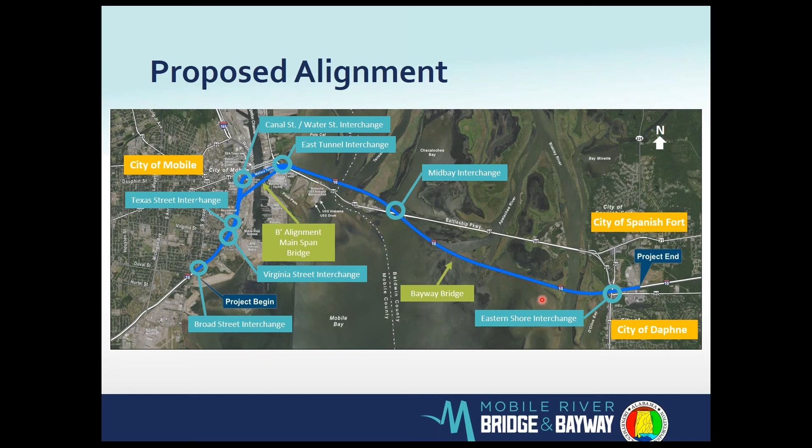7 interchanges. You've got 3 different cities to deal with. You've got the city of Mobile, Spanish Fort, and the city of Daphne. So you've got 3 of those. You've got 2 counties, Mobile and Baldwin County, and a partridge in a pear tree. So there is a lot of stakeholders in this thing. So you can imagine the environmental hoops.

Real quick, just a brief discussion. Near the main piers, you're encountering, which is the MB1 boring, sand that's really kind of a loose sand. You get into a little clay layer, then you go back into denser sand, medium dense to dense sands, and then back into a pretty stiff, very stiff to hard clay. On the Bayway, however, we had about 35 to 40 foot of weight of hammer type material. Muck, basically, is how we call it down in Alabama.

And by the way, if you can't understand me, I've been in Alabama for 18 years, so bear with me.

Then we get into more of a medium dense to dense sand and then back into a clay. So it was fairly consistent across the Bayway, that material, as you would expect in alluvial soils down there.

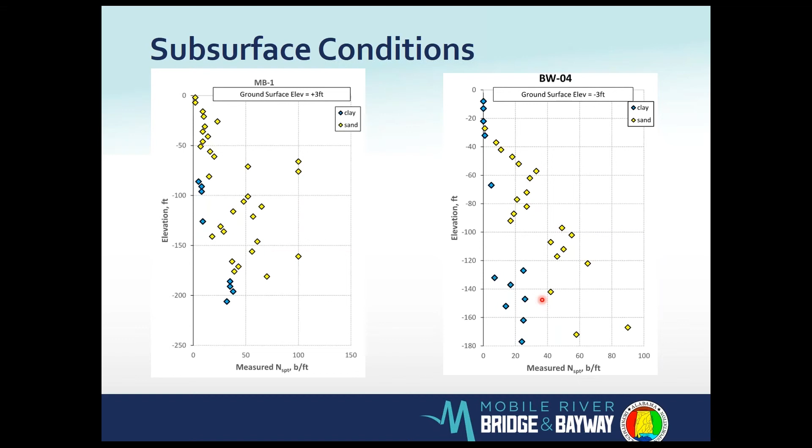So number two, this is where the meat of what we want to talk about, the decision for a pre-bid load testing. A lot of times when you go into these projects, you get limited information. You may get borings that are spaced really far apart along a project alignment. You're told, hey, you need to come up with a bid. You need to do something with this.

Well, on this project, ALDOT actually invested a lot of money in the upfront geotechnical exploration. In fact, they did over 24,000 feet of drilling with borings up to 320 feet. There was information for consolidation, shear strength, cone penetrometer testing. In addition to that, the winning concessionaire team is going to have to do their own geotechnical exploration. So you're going to have a lot of information.

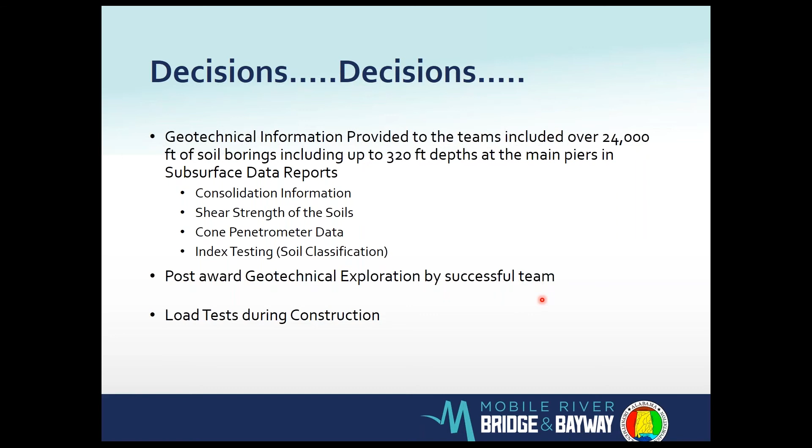So that should be enough, right? Depends on which side you're on. If you're an owner, you're like, hey, I've spent a lot of money. I've given you all the information. If you're on the contractor side, you're like, please, give me some more information. I want some more. So that's where we kind of got into this. And so from ALDOT's perspective, we needed to answer 3 questions for them that really help them understand why do we need to do a pre-bid load testing on this.

So the first one we wanted to address, what are the project risks with the foundations on this project? Obviously, most of it is going to be across the Bayway. You're going to have a lot of foundations in there. What are those type of risks? How much will it cost? We wanted to flip this one because that's really what every owner wants to know. How much is this going to cost me? Well, really, let's look at how much this is going to save you in the long run. And then why is this important to the project?

So the first one, this is a critical path item in the schedule. Bayway has so many piles on it, that's going to be your critical path forward on this project. And a lot of the contractors anticipate that. So what can we do to help them out? The high foundation loads, you're going to have a lot of those with the storm events, the vessel impacts, and the performance issues. You do have all this soil information, but it's really good to actually marry up those soil parameters with a good load test.

And so that's one of the things we wanted to try to help the teams out, understanding the dynamics of matching up and calibrating some of that geotechnical information to a load test. So it helps them with their design be a little bit more efficient. And drivability, we wanted to look at the means and methods. What do they really need to use? If they got a jet, that takes extra time. If they can just drive it from the get-go, save some time.

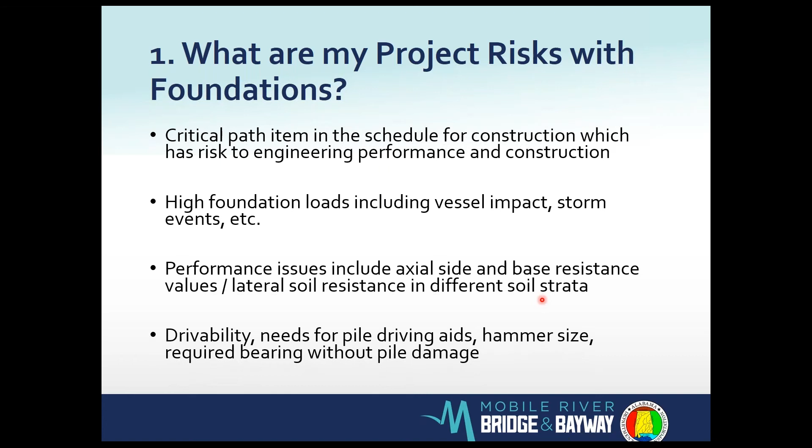So how much will it cost? Well, this was an interesting one. We had to really put our pencils to work on this. But we tried to give them 2 different ways to look at this for how much money they would invest. One of them: at the time when we came up with this in 2017, the estimated project cost was about $1.5 billion. So what we said was, okay, let's be conservative and say about 40% of the project cost was going to be in the foundations. So if you did that, that's about $600 million.

So what if you saved 1% of that $600 million with some load testing? That's $6 million you may have to play with for a load test. You can do a lot for $6 million in a load test. The other way we wanted to look at this was, okay, the Bayway is about 7 miles long. In 2 directions, that's 14 miles. And the existing span lengths are about 65 feet. So we assumed 3 foundations per bent.

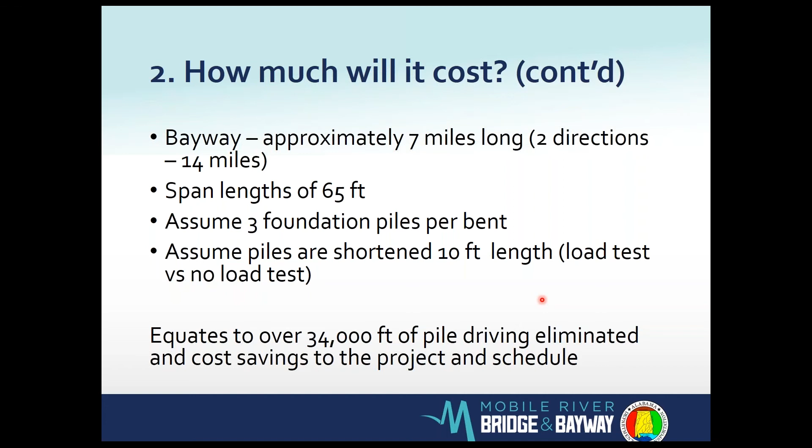And say through calibrating their soil parameters and their design, they might be able to shorten those piles up, say 10 feet per pile. Now you're looking at over 34,000 feet of pile. That is a lot of pile that could be potentially saved in their schedule and their contingency, because they're supposed to have this thing constructed in about 5 years. And that's a lot. So then we finally got to the point, why is it important to this specific project?

And obviously some of the same things wrap back around, but it's information on the performance of various foundations. We're taking some of the guesswork out for them. We did in this test, as you'll see, different types of foundations. We did drilled shafts, pipe piles, concrete pipe piles, steel pipe piles, and prestressed piles. So we gave them a variety of some of the different sizes.

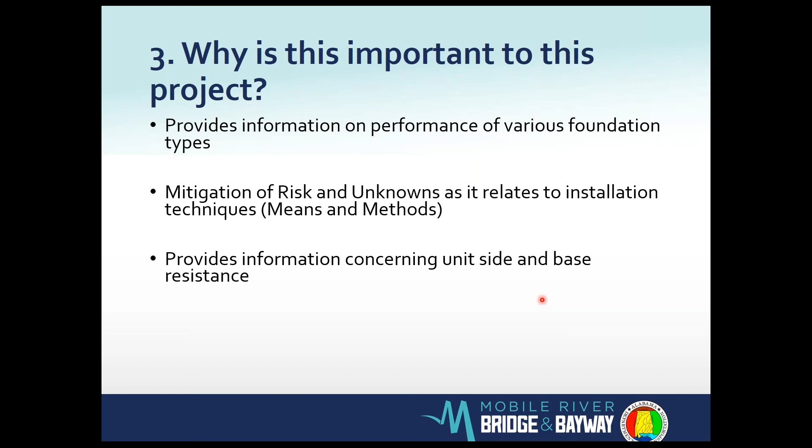Mitigation of the risks and unknowns. How does the installation of these foundations go in? How does that help them out? What can they do? And then obviously continue to provide that unit side and base resistance, and then it improves the reliability, therefore reducing risk. If a lot of these are doing some of the same things, they're fairly consistent, that helps them understand that a little bit more.

We also did restrikes, so we were able to help them out with looking at some of the setup factors down there. In Alabama, we have some soft clays, but the majority down where this project is, there's a lot of sand. So the dissipation of the pore pressures works fairly well. Setups are moderate, and you'll see a little bit of that when we go through the results. It also assists in establishing specifications for the pile installation.

This is the big one. Concessionaire teams and the design-build teams always put in a contingency, especially when it comes to the geotech, because that's a big risk item. For a concessionaire, especially in P3, this is a financial deal for them. That's it. Beginning, close, financial deal. At some point in between there, a bridge gets built. If it does not make sense as a financial deal, that's going to be a problem for the owner, because the owner's going to have to cough up more money.

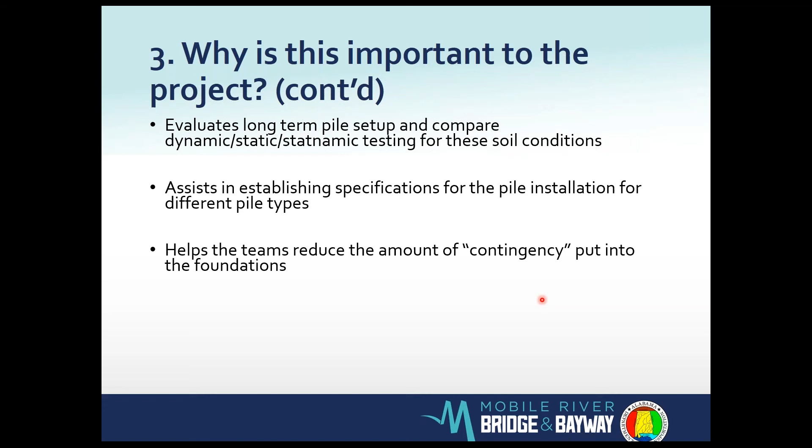So if they're having to raise their contingency on the concessionaire team, now the owner's having to kick in more money on this side. So if they can try to reduce this contingency on the team, then they have to come up with less money if they can make that work. Make sense? If it doesn't, we can talk later.

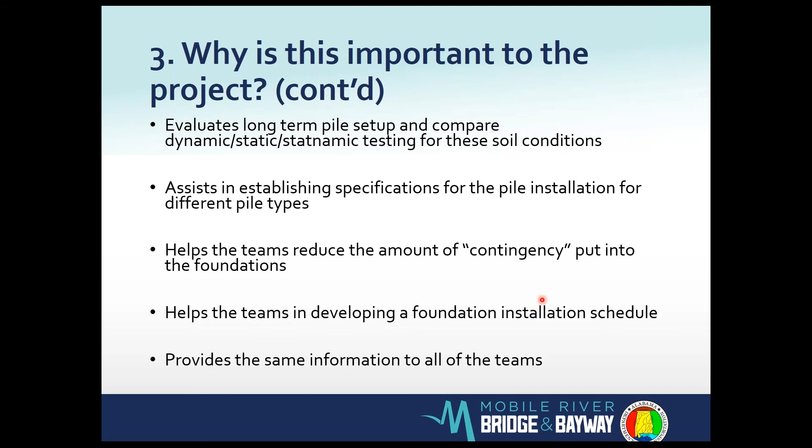And then also the foundation installation schedule, to help teams better understand, like I was talking earlier, can they drive these really quickly, effectively, and keep moving. The other part was all this information was equally provided to the teams. All three teams got this information. They got the installation records, the concrete pour records. They had the opportunity to have a representative on site to watch all of this, fully provided to them.

Load test program. So ALDOT looked at this and they said, go. You know, these are the 6 phases of a project as soon as this hits, because of how fast this was.

We didn't really get through all of these. Number 3, panic. I kind of induced panic on the environmental people just for a second. I'll tell you this funny story, because I enjoy doing that to them. I walked in once ALDOT said go, and I said, hey guys, to the environmental people, I need to get a permit for the Bayway for doing some pile testing.

And they said, well, what are you going to do? I said, well, I'm going to set off an explosion. Now, I know it's a slow burn. It just happens to be really quick. And so after they picked up their jaws off the floor, they said, no, really, what are you going to do? I said, no, I'm really going to set off an explosion on the Bayway.

And so then I showed them a video. Again, they had to pick up their jaws off the floor. And they said, okay, so are you going to remove these piles after you're done? I said, no. And they said, well, can you cut them? I said, I can do that for you. So it's always fun to mess with the environmental people every once in a while.

So load test schedule, we got the approval in August of 2017. For this to work originally, in May or June of 2018, that was when the final RFP was originally scheduled to come out. So we had to have all that information done in a short amount of time. So they gave us about a month to put plans together, another month to get through Office Engineer and advertised.

And ALDOT did wonderful. They worked alongside of us. We were shifting paper and designs back and forth. And it was let officially in December, and the notice to proceed hit in January.

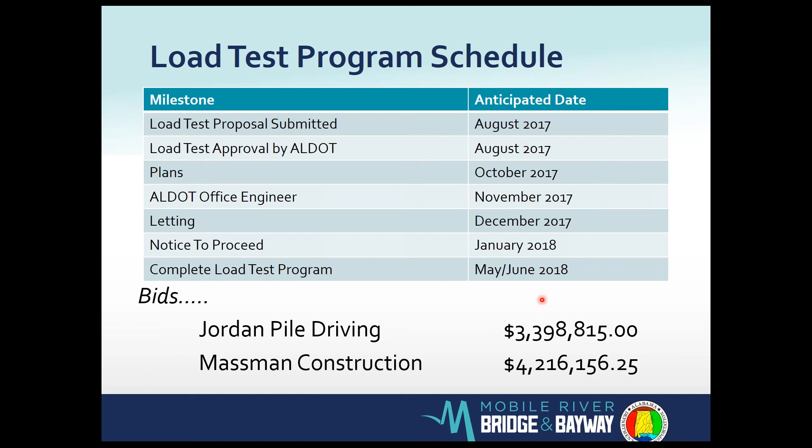Good. Okay. So 2 of the teams, one was 3.4. Jordan Pile Driving had a laydown yard right there, so it worked out well for them. Real quick, I've got about 5 minutes. Load test program. We did a drilled shaft, 72-inch in diameter with a 78-inch permanent steel casing. That was installed to about 54 feet below the existing ground surface. The actual length of that shaft was about 175.

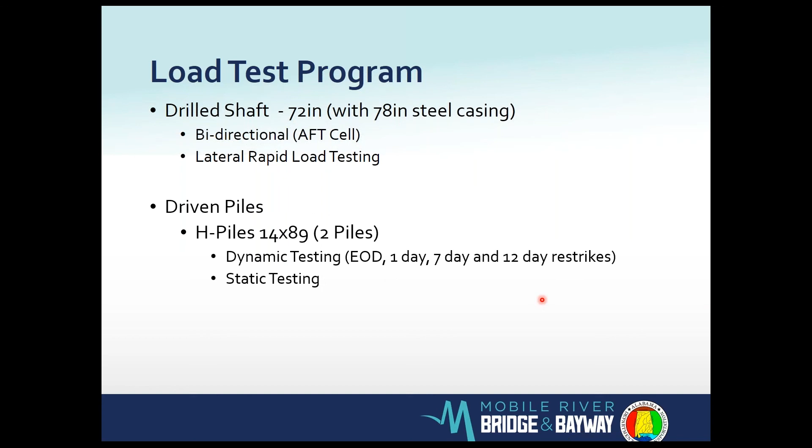We did lateral rapid load testing and bidirectional load cell testing. We did driven piles, H piles 14 by 89, and the precast concrete piles. Along the Bayway, we looked at 54-inch concrete cylinder piles for the majority of the way. Sorry, I hit the wrong button. And a 30-inch square pre-stressed concrete pile as well. Also, we did the restrikes to get a little bit of setup.

Finally, we ended with a 60-inch steel pipe pile near the base of the main pier. So we had a drilled shaft and a steel pipe pile just to make sure we went well on that one. We originally told them they could vibrate in the first 100-foot section, add a 75-foot section, and then drive it. The contractor elected to do the 75-foot section first. We didn't have a problem with that, so we rolled with that one.

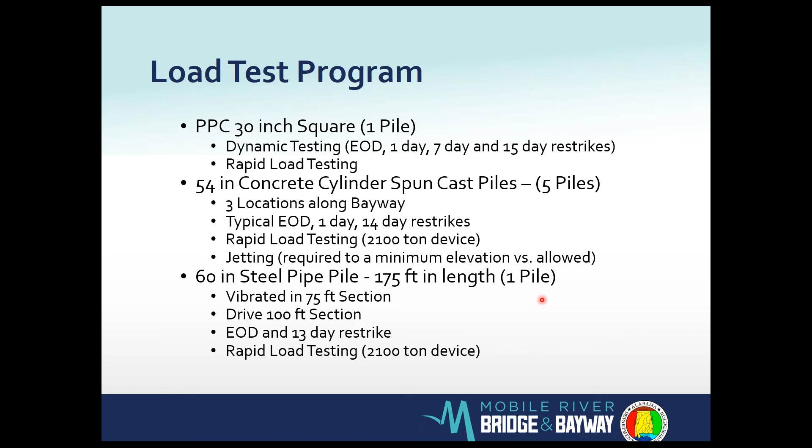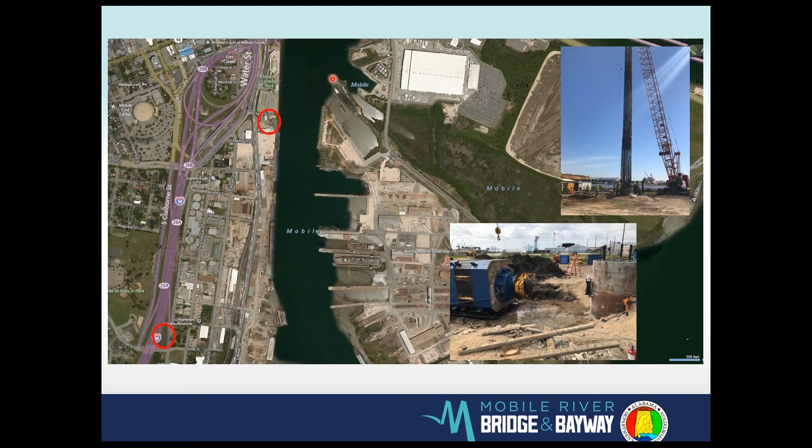So in the lower left-hand corner, that's where they had the 14 by 89s and the 18-inch precast piles. Here's one of the main piers. The other main pier will be over here in the water. And then along the Bayway, this is where we did one 54-inch. We did 2 54-inches right here and a 30-inch. And then over here we had 2 54s.

This one was where we wanted to really evaluate the installation techniques, and this is a big lesson learned for us. When I was reviewing the results that came out of this, the capacities were almost identical, and I called up the CEI guy and was like, hey, what happened with this? They're supposed to jet to a certain depth with the pile and then drive it the rest of the way, and the other one was just an optional jet.

And he said, well, when he went back to look into it, the contractor had jetted the day before down to the specified tip, then stuck the pile, rather than sticking the pile and then jetting the pile down to that tip and then driving the rest of the way. So when you look back at the specification ALDOT had, the contractor did it by the letter of the law. Did he do the intent? Not necessarily. So that was a big lesson learned. Always make sure to double check those specs.

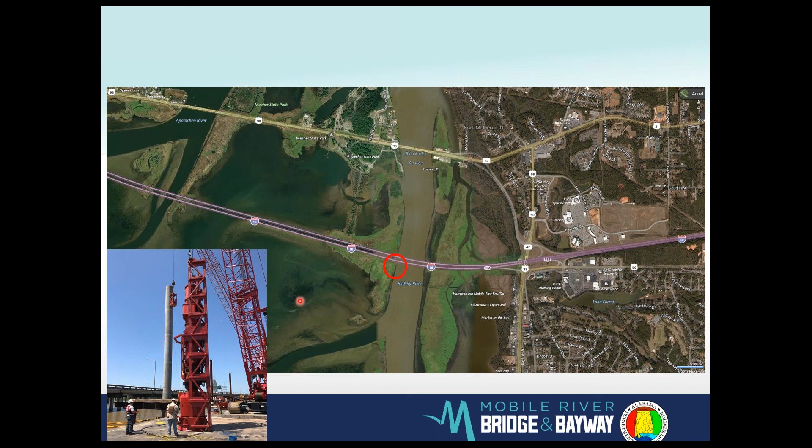And also in the theme that everybody's been using a D180, we also had a D180 on site as well. So it was a big old hammer. It actually cracked the crane mats when they lifted it off and water came out of the ground. So I had a fun conversation with the guy on that one.

So real quick, I'm not going to show this video. A lot of people have seen a rapid load test. The funny part about this one was we did a rolling traffic block on I-10. So traffic was not allowed. And it gets eerie when you're standing out there and traffic's been hitting every segment and you're hearing that, and all of a sudden it gets quiet. Then you shoot that thing off and it echoes through the whole valley.

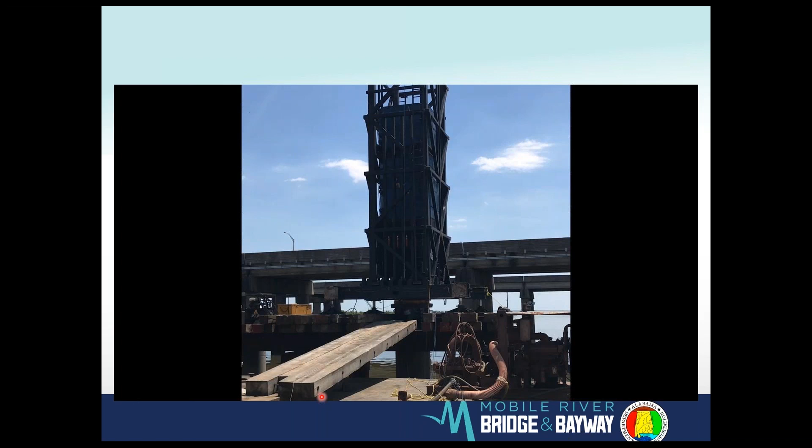So the first time, we're almost back to the dock, a CEI guy gets a call and he said, hey, did you notify everybody that you need to notify, like the fire department? He goes, well, I told the police. Thought that covered everything. He said, well, the fire department's out here, and sure enough, all the fire trucks were running out there because with the rolling traffic block, somebody called in when they saw the flame shoot out the top and thought it was a terrorist act. And so that was fun.

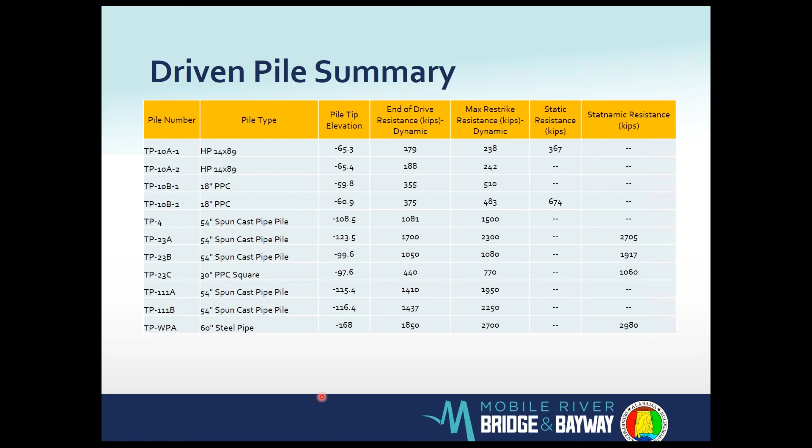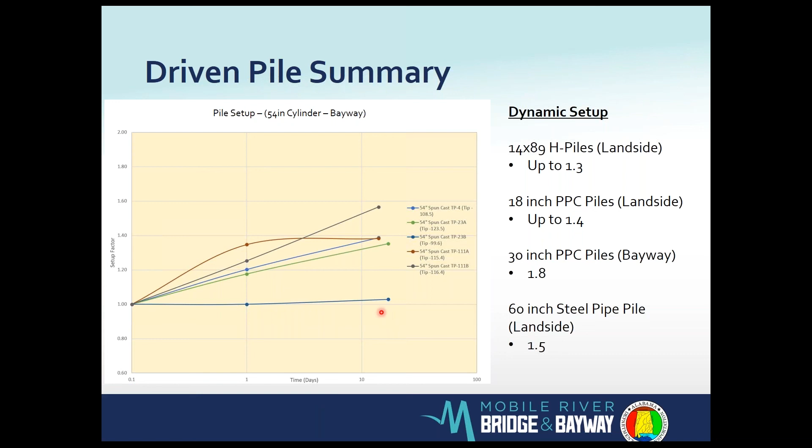Results, this will be posted on the website. I know I'm running out of time, so we'll go through this. But obviously, we did the restrikes. I have this summarized. We had the rapid load testing results. Here's what we saw for the setup factors. Typically, we ran those anywhere from about 1.3 to 1.8, depending upon the pile and depending upon where it was loaded. We did have an anomaly, a little one that was a little bit less down here, but that was also a shallower tip depth.

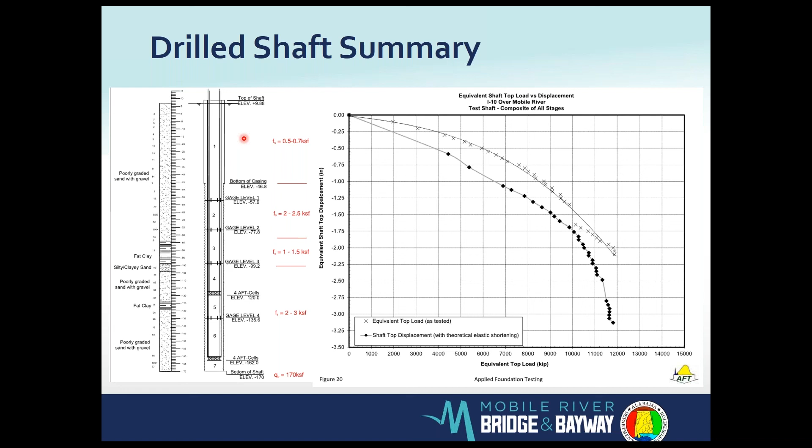On the drilled shaft, with the 175 feet length and the loading, in the upper soils we got about a half to 0.7 KSF in the skin friction. Then it went to 2.5 in the denser sand. Back in the clay, it was back to about 1.5, and then back to 2 to 3. The end bearing that we mobilized, though: ALDOT doesn't do a lot of drilled shafts down there, but I think it really showed them. End bearing, they were able to mobilize 170 KSF. So it worked really well. It was drilled under polymer as well.

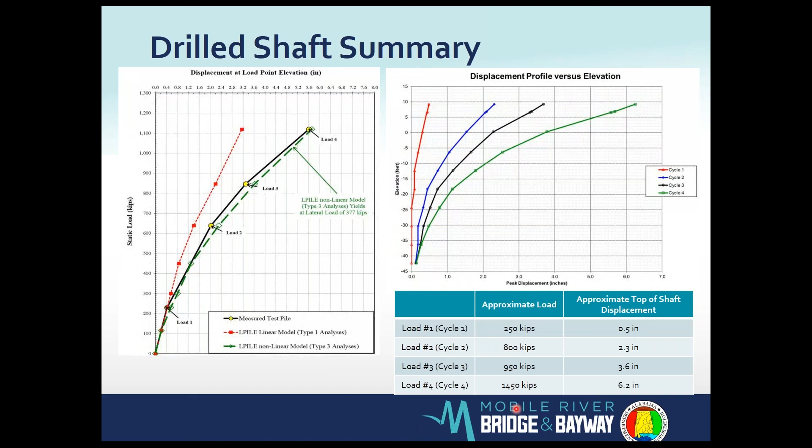Drilled shaft summary. So matching that up, we did 4 load cycles on the lateral, as you can see there. Matched up really well with the p-y curves on the linear, non-linear springs. And going forward, right now we are at the point where they're having the public meeting next week. Supplemental EIS has been signed. Once the ROD hits, they'll drop the final RFP, and proposals are due at the end of this year. So as I said, probably the next 5, 6 years of my life may still be wrapped up in this.

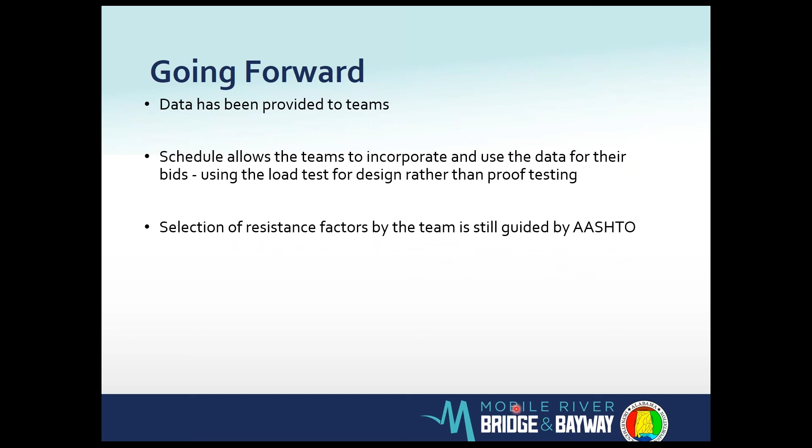All the information is provided to the teams. Will we truly know the savings? Probably not. Each team will use those differently, but we know we're saving enough money that should help facilitate the project forward. So with that, I believe I'm out of time.